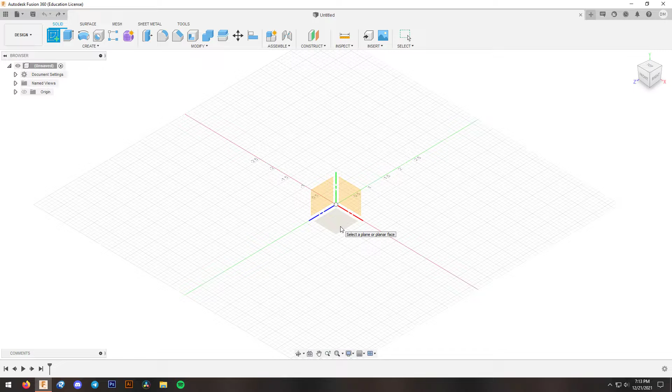Create sketch. I always sketch stuff typically from the top or from the front. Yours, I'm going to start on the front so that it looks correct from the top and the bottom, since you have a threaded hole on the bottom. Come up here to 2-point rectangle. If you hover, you can see that it has a keyboard shortcut. I'm not sure if yours is R. I've changed a lot of shortcuts on my computer.

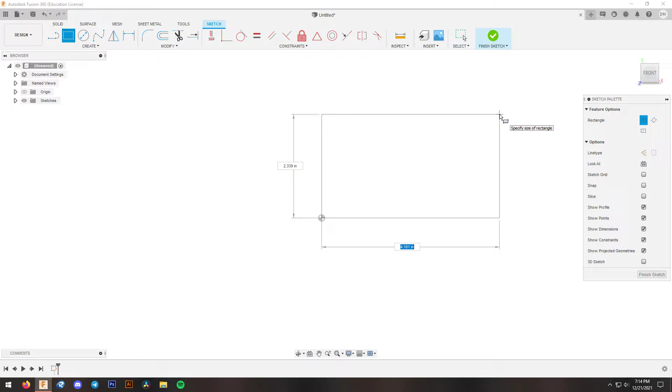But yeah, so we'll pull up a 2-point rectangle, click and drag, and we'll make it, I don't know, 2 by 4. And this is in inches. My workspace is in inches. I don't know where yours is at. Millimeters, maybe?

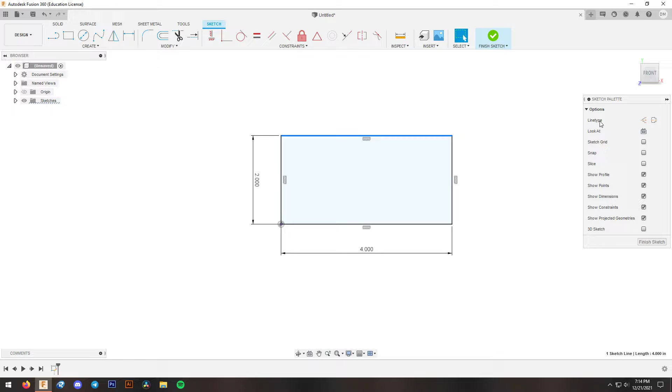Anyways, so now we have a rectangle here. You can click this upper line, and then you can actually go over here to the sketch palette line type, and you can click construction. And what that does is it doesn't make this a solid body anymore that you can draw from, and this is now just something that we can put a circle on, and it snaps to this line from the center out, and then we can further dimension it in a second. And I'll show you how to mirror stuff, so you really only have to draw half of it, and then you can cheat it and do the other half of it.

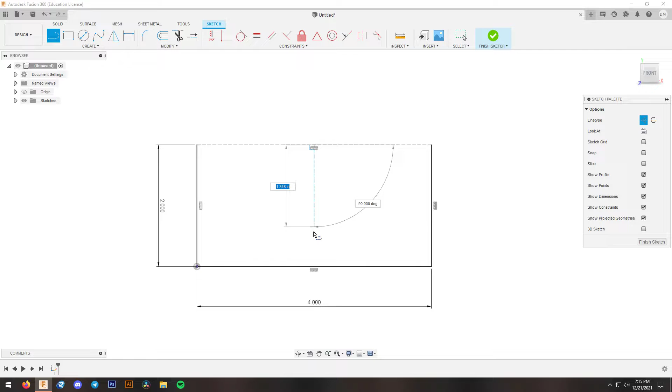So we'll come up here to line. Keyboard shortcut on mine is set to L. I don't know what it is standard. And then over here for construction, I have that set to X on my keyboard. So we'll make a line, and we'll make it a construction line. We'll come here to the center, denoted by that triangle up at the top. It'll snap to it. Click there, and you can bring it all the way down. You can bring it down halfway or a quarter of the way. This doesn't need to be the whole way. It's just a line that we're going to mirror the circle from.

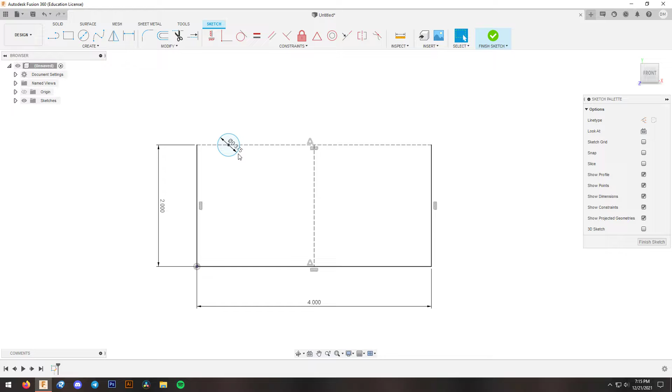So center diameter circle, C on my keyboard. Go ahead and bring up the circle, and then we're going to press X because we want this circle to be a body now. And let's see, I'll make it 375 just so it looks somewhat close to your picture. And then we'll zoom in a little bit, bring the line back, snap it to here, and we're going to bring it over 2 millimeters to there. And then hit escape to make sure you don't have any tools brought up right now. And then you're just going to drag this over close.

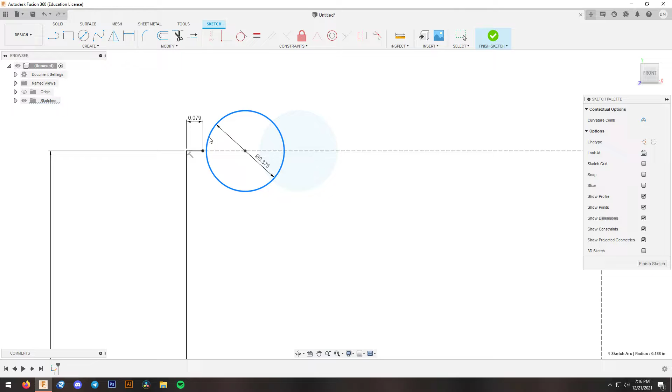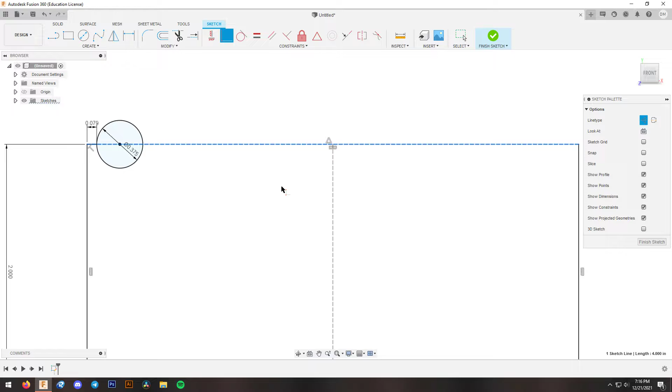Click it, click the point, click coincident, and now this edge of this circle is precisely 2 millimeters away from the edge right here. So now the fun part is, we can take this line that we've snapped everything to and delete it, because now we have all of our dimensions snapped to this, which is perpendicular, this symbol here, to this line. The circle is where it needs to be. So we can press L to bring up the line again, snap to this line, drag it all the way over, and then click it, bring it all the way to the center.

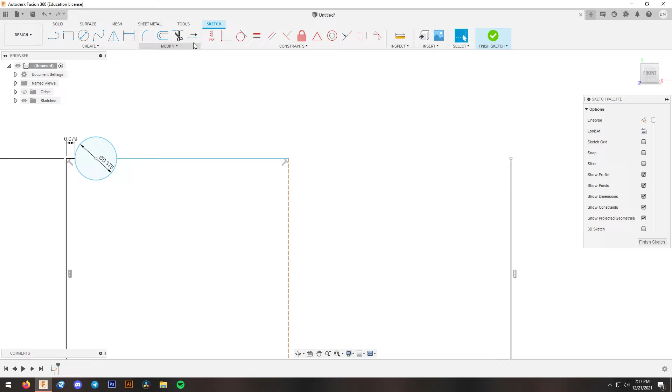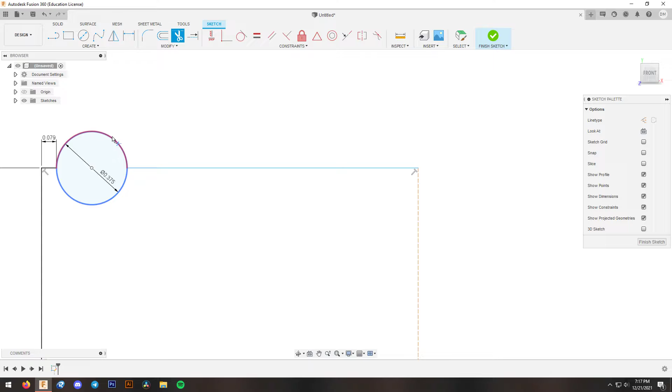And now you'll come up here to modify, and you can come to trim. I have it at T. Check your keyboard bindings for stuff. T, I think, was bound to another option I wasn't ever going to use, really. So grab the T trim tool, hover over the circle that you've made, and you can see the top of it. If you hover over it, the top of it will get trimmed out to the nearest line, which is this line and this line now. So you can click that, and it trims it, and now you have half of it.

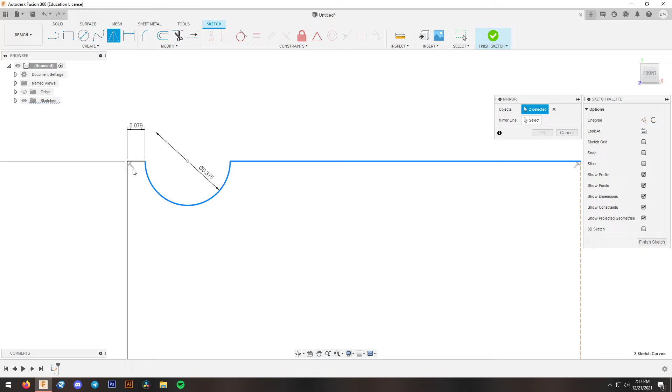Now what you can do is come over here to create, and down to mirror. You're going to click this half circle you have now, and then this mirror line. You're going to select this, click OK, and now it's a solid body.

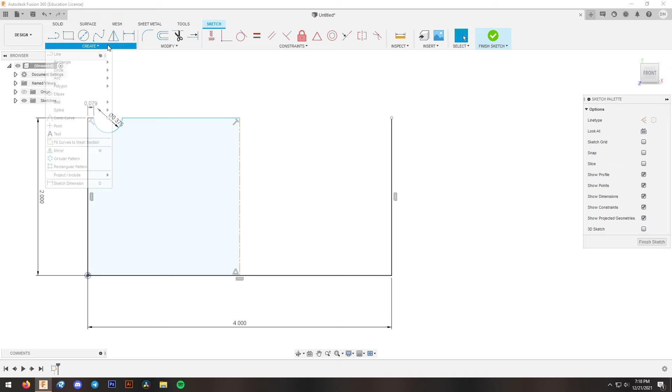If you wanted to go a step further, you could make the line type a construction and a center line, or just a center line. I guess it doesn't like that, it doesn't want to be both. So mirror automatically snaps to this as the center line because it's a center line, so it automatically becomes a mirror line.

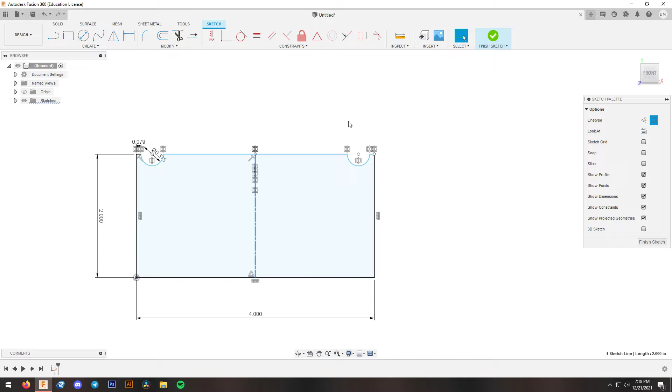And then for objects, you're just going to click 1, 2, and 3. You'll zoom out and it'll be projected here. Click OK. Then you can re-click this mirror line and make it a construction line, just so this becomes one solid body, unlike the rest of it.

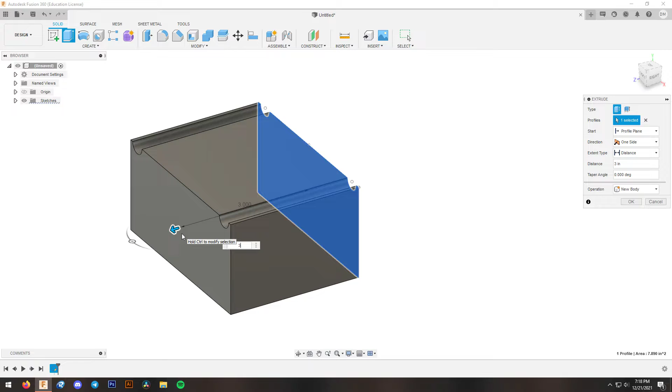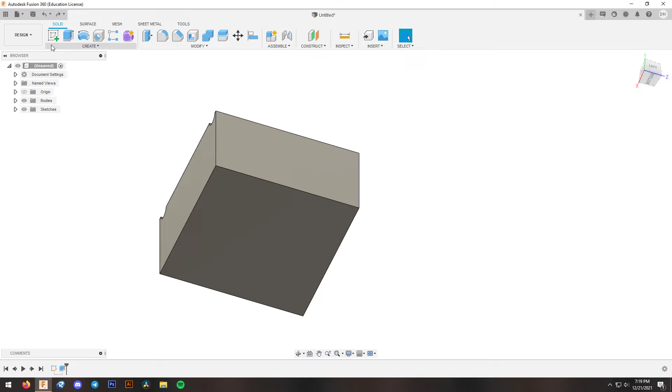Let's do the hole on the bottom. So create a sketch, and click the bottom so that it's on the bottom plane. What you can also do, if you wanted to, is make sure it's specifically the bottom of this object you've now created. Click that, click line, make it a construction line, and drag it from corner to corner.

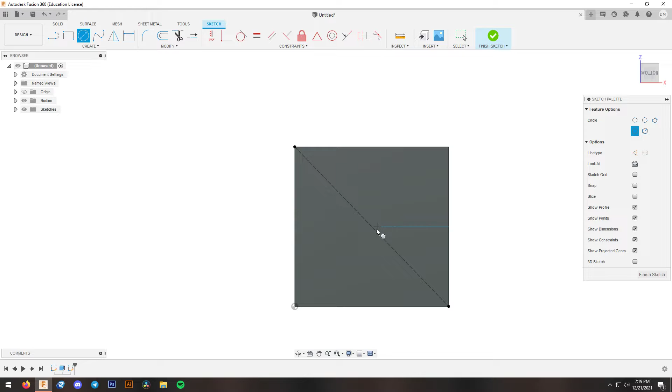Then you'll do a circle. Make sure to take construction off, and drag it along here until you get that center right there, and we'll go 0.250. Enter, zoom in.

Extrude it, which I didn't say earlier, but I have extrude bound to E. So take note of the arrow—we're going to go negative 0.375, just to give it something.

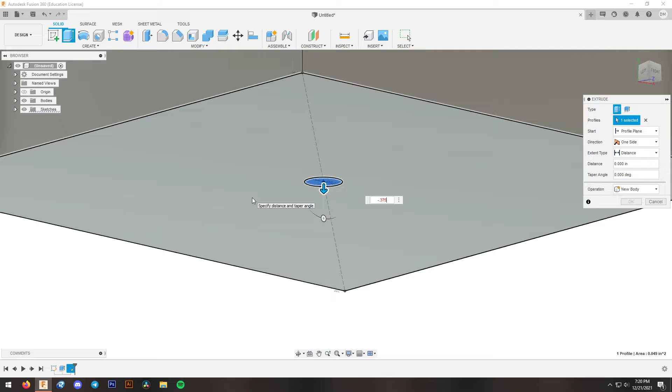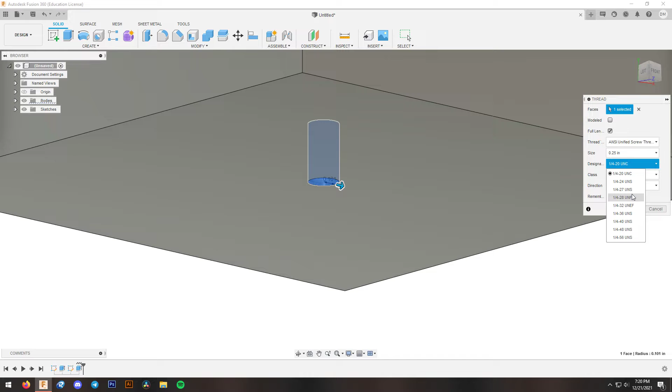Hit enter, and then we'll come back here to solid tab, create, drop down, and go to thread. We're going to click that. It's going to snap automatically at 1/4-20, or 1/4-28 is national fine. Everything else right here is not standard—it's either UNC for Unified National Coarse or UNF for Unified National Fine.

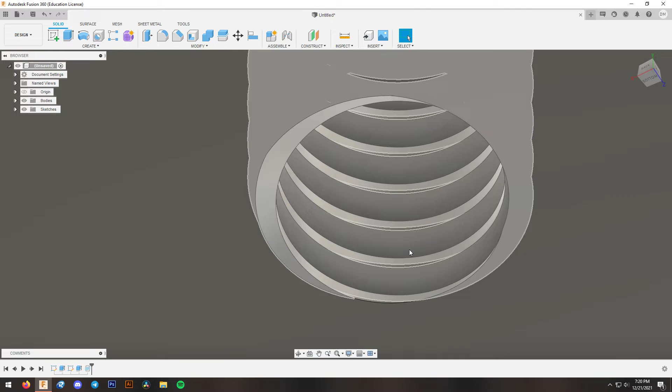1/4-20, click modeled, and now as you zoom in, you see it's actually modeled sharply. Then classes—it's just how loose it is. A class 1 would be a looser fit, a class 3 would be a tighter fit. Go ahead and hit OK, and now you've got your 1/4-20 hole right there.

And then just for style points, what you can do is solid, modify, press pull, which automatically will make it a fillet. So right here you see it's like a waffle looking thing, and now you've made it a more shapely waffle next to it.

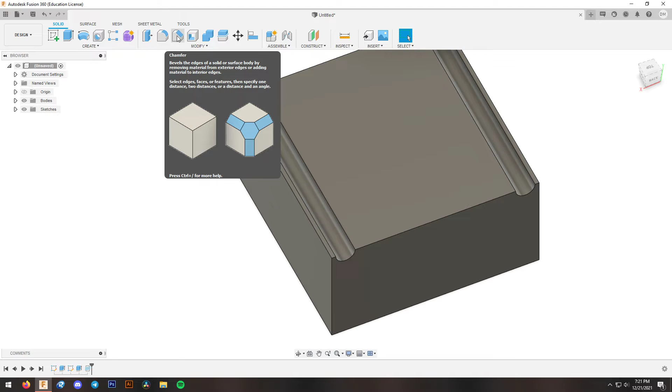Chamfer is for chamfering, so everything is usually on like a 45 degree—chamfers are usually like an 82 degree countersink. So cut it in half and it's a 41 degree edge that you're putting onto it.

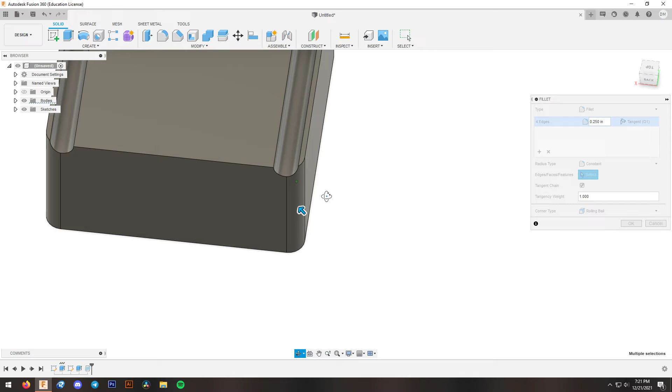Just two different looks that you can go with, but we'll click fillet and we'll click the 4 outers and see how those turn out first. We'll do a 1/4 inch radius just to kind of smooth the look of it out.

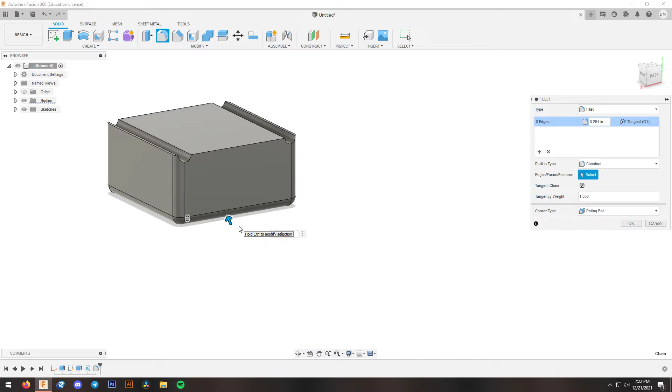And then the bottom of it's going to be on a post, a tripod you said, so the bottom of it could stay flat if you wanted to. The trouble is, once you print this, if you were to press pull the whole bottom 1/4 inch like that, you would just have a smaller bed to print on—you'd be printing on this instead of it being the whole flat piece. Something like this isn't really going to matter, but just something to keep in mind.

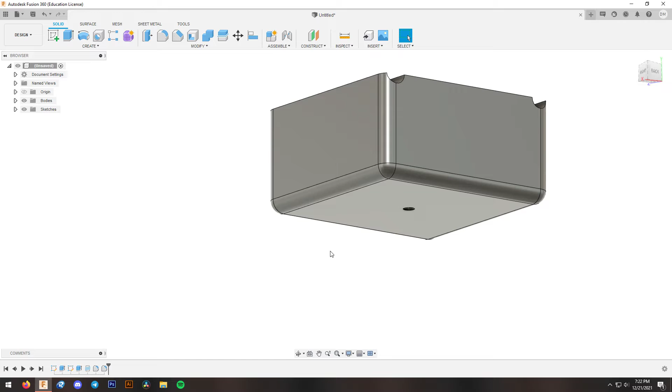Sometimes when you're printing these edges, they'll droop down because they need a support. It just depends on the material you're using, the temperature you're printing at. There's a lot that goes into it.

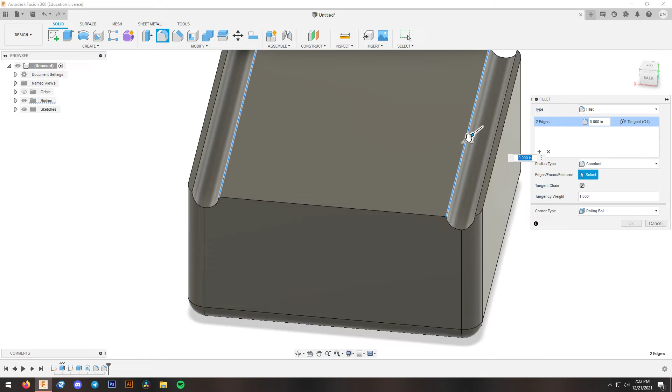So there's that. If you wanted to, you could pull these out just so it's not a sharp edge. The bummer is once you do these, well, you'll probably end up doing too many edges, just these edges, and you can do them like 0.1. Let's see if the other ones will like maybe a 0.060 thou or something.

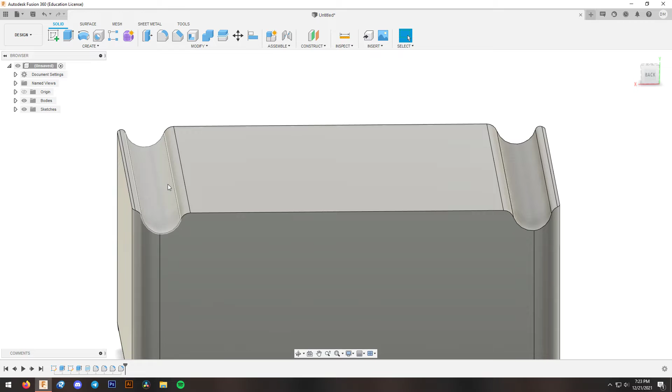Yeah, there you go. Okay, so it just makes it a little shapelier. If it's real sharp and it's not perfectly lined up, radiusing the edges will help it kind of fall into place.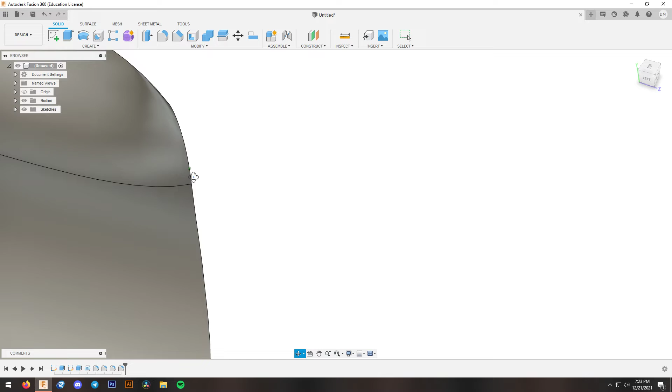So you can do that. You could also run back to here. You could make it the whole length, full 100. And then you can see out here on the edges, it's kind of starting to get like some weird deformity to it. But that's okay. If you wanted to keep going, you could fill the whole thing if you wanted to.

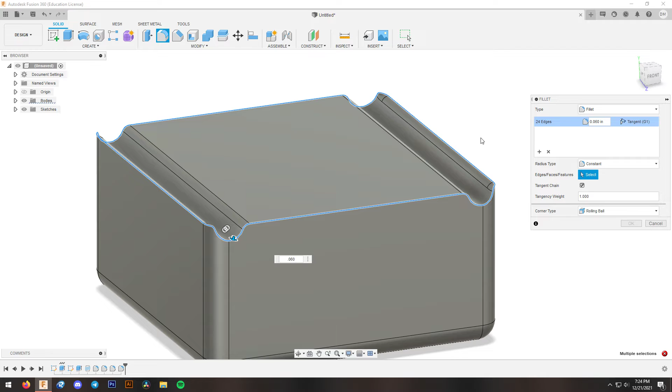So that's the whole thing you could do. I'm not sure if this is gonna work because it might take out this feature here. 60 thou. Yeah, it doesn't want to. See down here, multiple selections could not be made at the size. So you could try it at like 20 thou, 10 thou, 5 thou. Yeah, you can't make these any more rounded than it is unless you wanted to do just the front edge of this and that, and still can't because it selects too many of them.

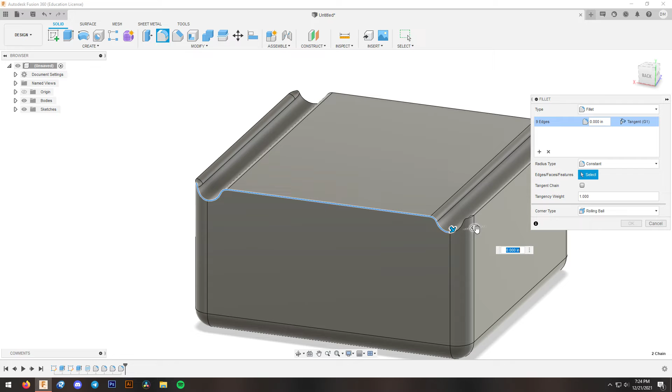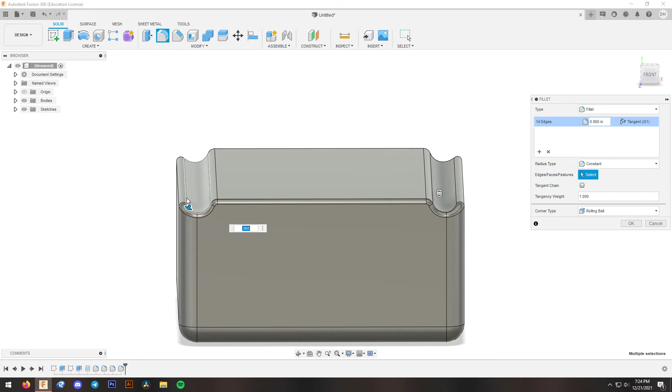Let's see. We don't want a tangent chain. So what we can do then is just, let's try to make it just the cups, the centers, not the edge. Oh, there you go. Kind of gets rid of the locking it into place kind of deal.

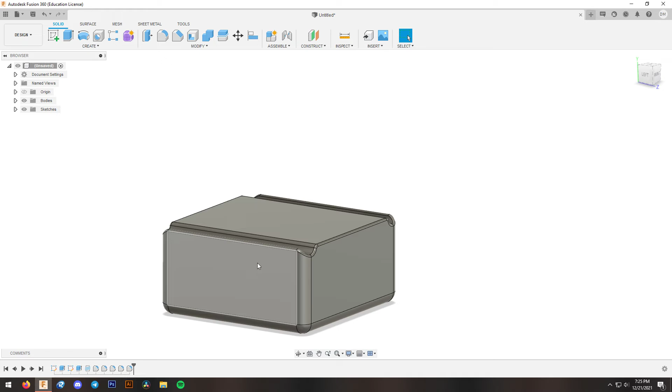Ooh, 40 thou won't work. 50 thou does though. 45? 47 does. Anyways, you can keep fucking with it and trying to make it look more shapely and organic if you wanted to. But this is the gist of it.

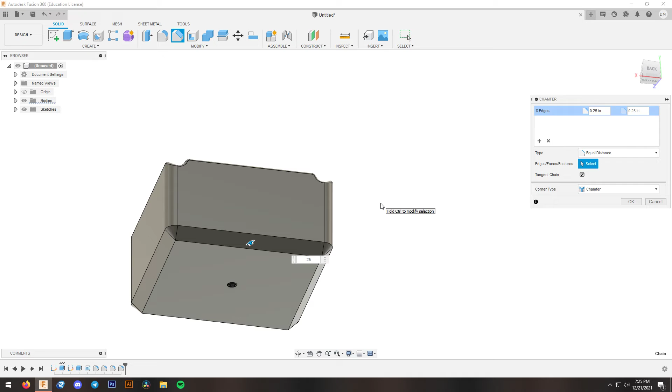Also, what we can do is this bottom one here, I can just show you real quick. You can come up here to chamfer, select that, 0.25. And you see it's just a different look. It's not rounded anymore. If you look at it from the left side here, it's that 45-ish kind of angle to it. Looks cool, just a different look, a different flavor of doing stuff.

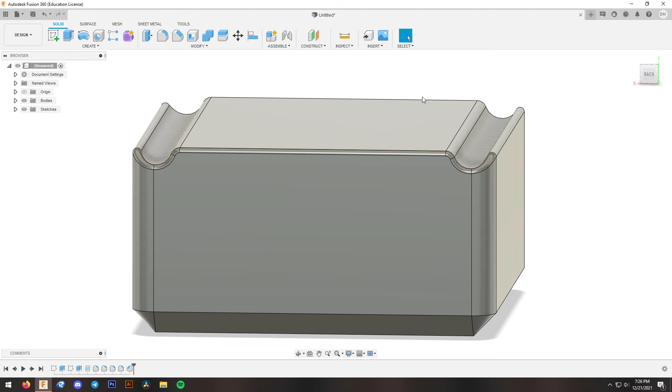And then I'm sure you know, mouse wheel click is to drag stuff around, shift and mouse wheel click is to rotate it. Or you could have just not sold your space mouse and now you have this. So yeah, that's pretty much it.

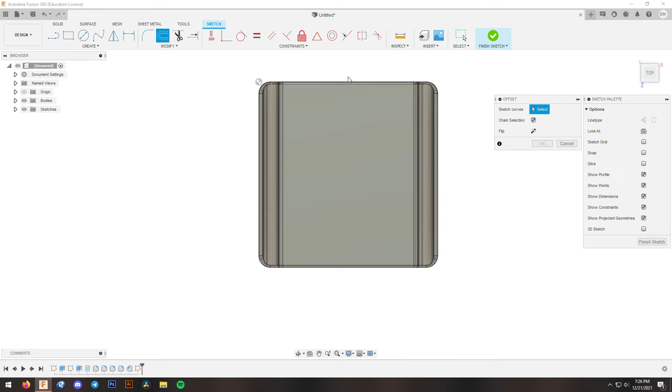I'll do one more thing while I'm here. So create sketch, select the top face. You can do an offset and you'll click the outermost lines for this full face right here. And you can drag and drop it kind of wherever you want. We'll do a negative 0.1875.

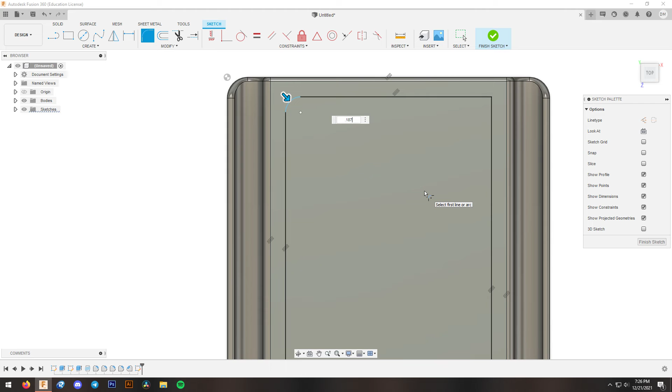Hit enter, and then up here at modify, fillet it, and you're gonna set it at whatever you feel like looks good. So you can do like a point. See what 0.187 looks like. Yeah, we'll do that. And then you'll run around and click all 4 edges. Hit enter. Hit extrude. Click that, and then mind the arrow again.

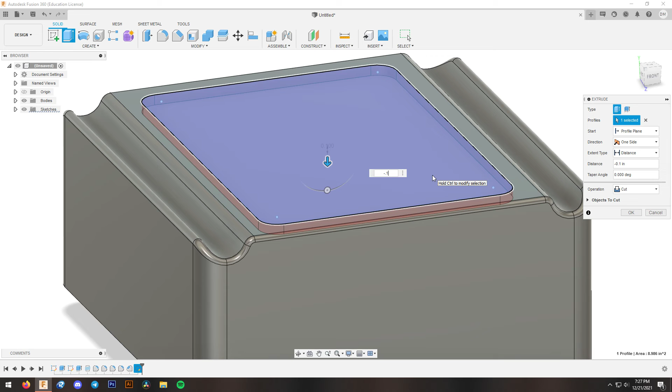So we're gonna go down negative, negative 0.1, just to show it. So now it gives it a little bit of depth.

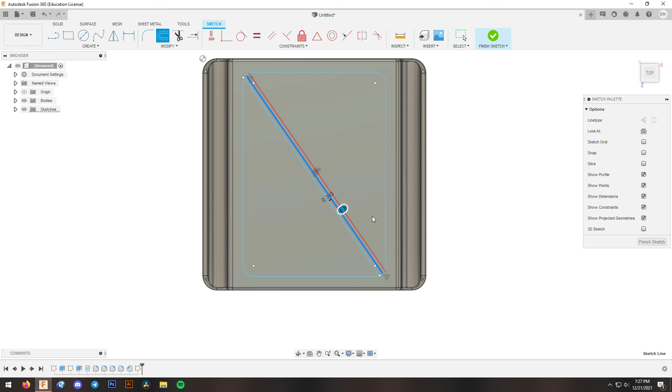You can do that. You can do Control Z. Hit a line from corner to corner, and then you can offset this 60 thou one side, and then offset just up here, negative 0.1625, 60 thou the other side. The center one, make it transparent, and then the trim tool right here, and trim these 2 out. Trim that one. Come up here and trim these 3 again.

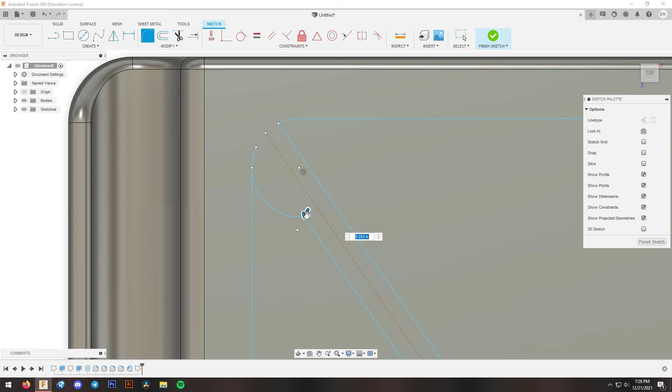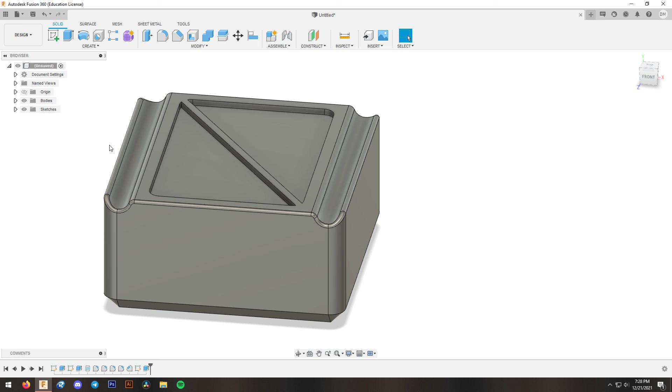That's fine. Just to show you, because you can break these up and then you have like a slightly different design on it so that when you print it out, look at it, cool looking, funky, whatever. So yeah, I think that's a lot longer than 2 minutes, but I hope it's helpful.